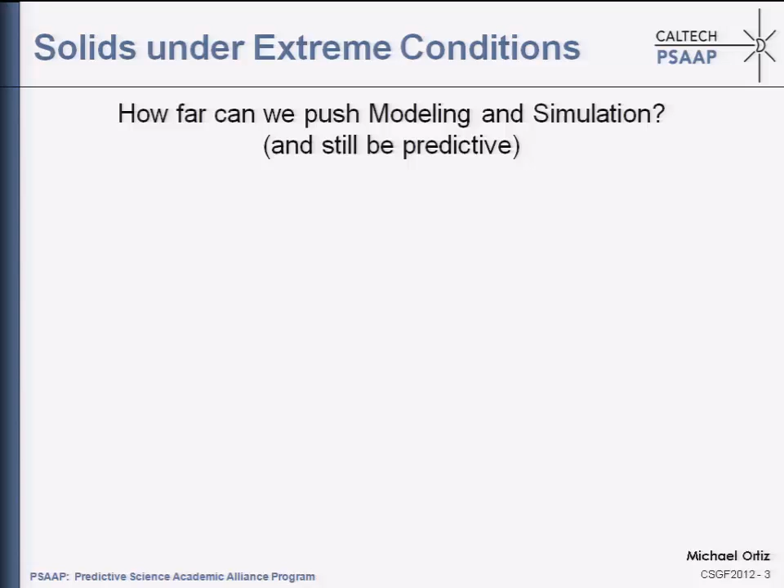Okay, so most of the work that I'm going to present is part of the Caltech PSAAP Center, the Predictive Science Academic Alliance Program, which I direct. It's one of five centers funded by DOE and NNSA over the country. And the main question that we ponder at the center is basically how far can we push our codes and our material models and still be predictive? Can we really predict material behavior and the behavior of complex systems under extreme conditions? So that's kind of our leitmotif.

And of course, you cannot ponder such a general question in a vacuum. So what we did from the start was to identify a challenging overarching application that would allow us to pursue the question in a concrete way. So we specifically chose hypervelocity impact. You see here some examples of hypervelocity impact tests. This is when you have a projectile that strikes a plate perhaps at 10 kilometers per second.

So you see here what happens; of course that's a very, very violent event. It really sets in motion very complex physics and very complex material behavior. Initially you can have, for instance, an impact flash where you have the formation of plasma. And in later stages, you can have the formation of debris and debris clouds. And these are things that you can actually measure in the lab. In fact, one of the reasons we chose this application is because we could carry out the tests in our own lab facilities.

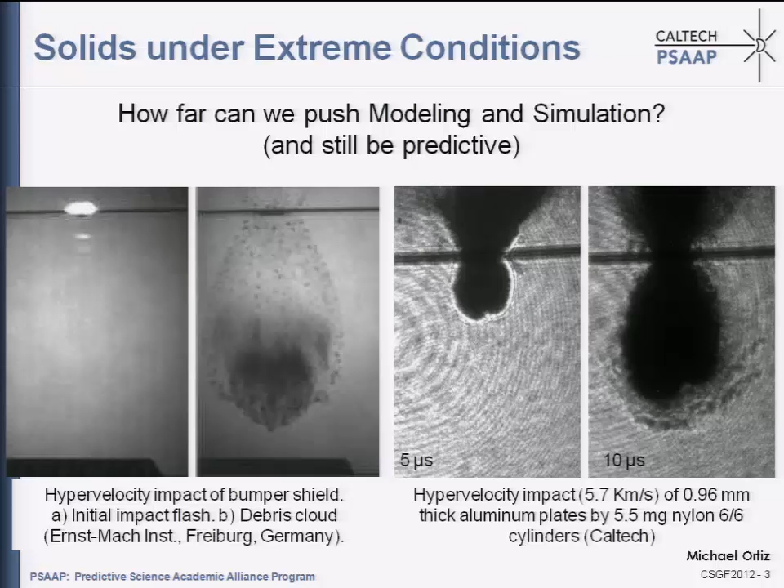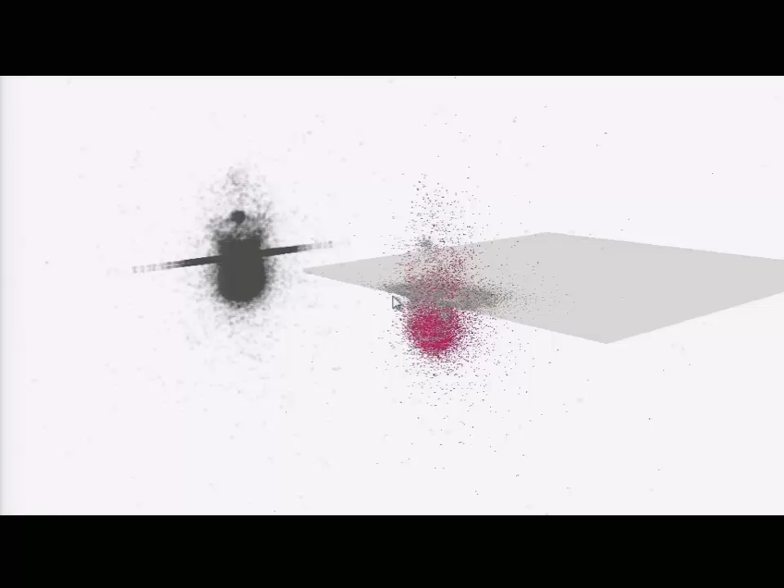And then each one of these things that you can measure, the intensity of the flash or the fine structure of the debris cloud, becomes a predictive challenge. So the question is, can you predict these things? So here's an example of how we do these simulations. These are particle simulations based on optimal transportation theory, where you have the projectile perforating the plate, and you can see, again, the formation of the debris cloud, forward cloud, backward cloud. And so we can generate many of the things that you can measure in the lab, and then we can compare and see how predictive we are.

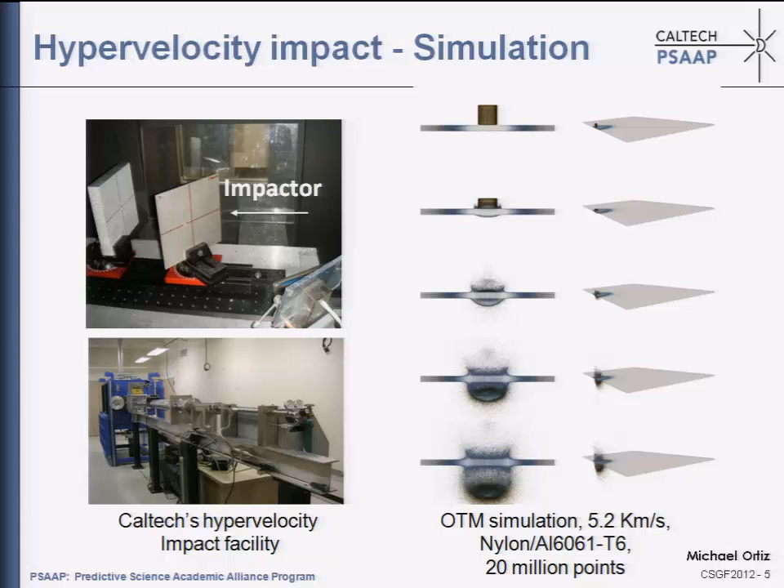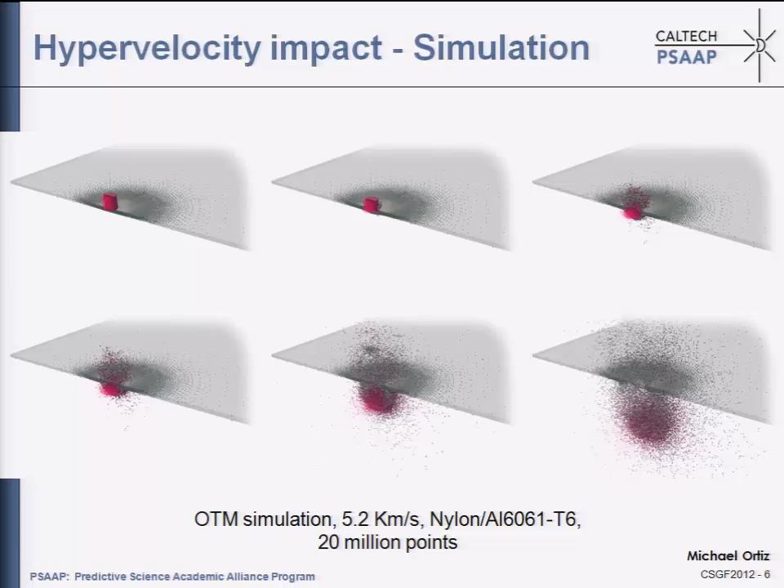So this is some of the lab facilities that we have in-house. Again, this is a typical simulation, in this case of hypervelocity impact at 5 kilometers per second. And the question is how well we can actually predict reality. So if we look at the anatomy of one of these simulations, you can see, of course, that a lot goes on. You have impact, you have complex material behavior, very high pressures, very high temperatures, very high strain rates. So the anatomy of a typical computational campaign is as follows.

You can think of it as consisting of several layers. At the top layer, of course, we don't do just one calculation, but we actually do thousands of calculations, what we call ensembles of calculations. And the objective is to garner statistics. The systems we are simulating are to some extent random. They can have random inputs, or they can become chaotic, for instance, fracture, fragmentation. And then the question is how well can you pin down the behavior of the system and what is the level of uncertainty in your predictions.

And for that, it's not enough just to send one calculation, but you have to do literally thousands of them, actually statistical sampling. And at this level, the purpose of the uncertainty quantification campaign, as it's called, is to, as I was saying, garner statistics and determine design margins and also levels of uncertainty. So that's very typical of the way we conduct calculations these days.

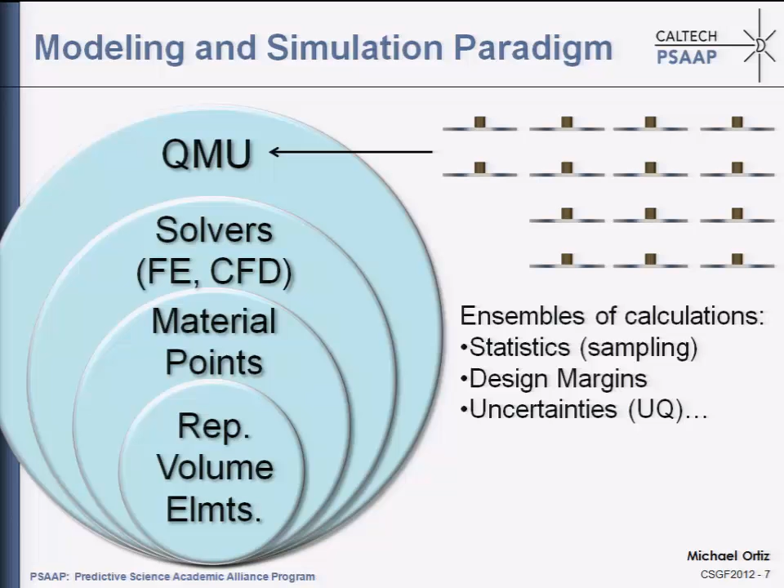It's not just doing one hero calculation, but actually literally doing thousands of them, and quantifying uncertainties. At the next level, you peel off the QMU layer, and you're looking at doing individual calculations. So here's where you have to contend with the global geometry of the system you're simulating. So maybe a CAD model.

You have to worry about boundary conditions, initial conditions, for instance, impact velocity of the impactor, the thickness of the plate. So these are all things that are passed into the solver, and the solvers are supposed to bundle all this information and move it forward in time. So this layer, the layer of the solvers, of course, is very sensitive to the details of the simulation, to the geometry, as I was saying, to the boundary conditions, to the initial conditions.

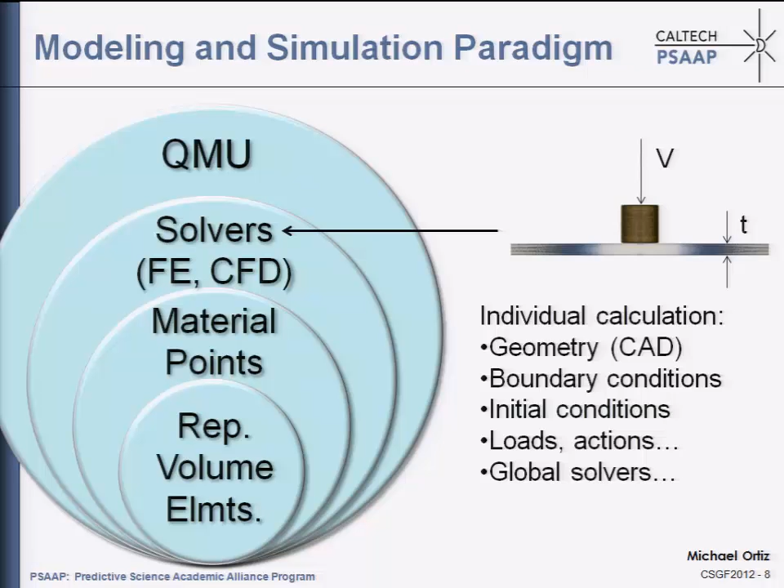However, if you move down one level, then at this point you're looking at individual material points, and these individual material points represent local material elements. So these are small bits of material that only see local conditions of deformation and temperature, and they're completely insulated from the geometry of the system.

So once you come down to the level of an individual material point, you have lost sight of the particular geometry that you're simulating, you've lost sight of the particular boundary conditions, and you're looking specifically at material behavior, the behavior of small samples of material. And that behavior is driven by local conditions and takes the form of material laws, constitutive laws, what have you.

And if you keep looking down in length scales, then you find that, in fact, material points are not just blobs, but they have a lot of structure themselves. So you start looking under the microscope, perhaps, and you see that an individual material point is not at all a point, but may have a polycrystalline structure. So it really represents what is known as a representative volume. If you keep looking down, maybe in each one of the crystals you begin to see individual defects, such as dislocations. You keep looking down, you start seeing individual atoms, and now you're at the level of quantum mechanics.

So it is this hierarchical point of view that perhaps describes best the anatomy of a modern computational campaign, if you want. And what I would like to focus on today is the description of the material at this level. So no matter what you do, the flow of information of a typical calculation will always take you at some point to the level of individual material points. And there the question is, can you describe that behavior? So that sets the boundary conditions.

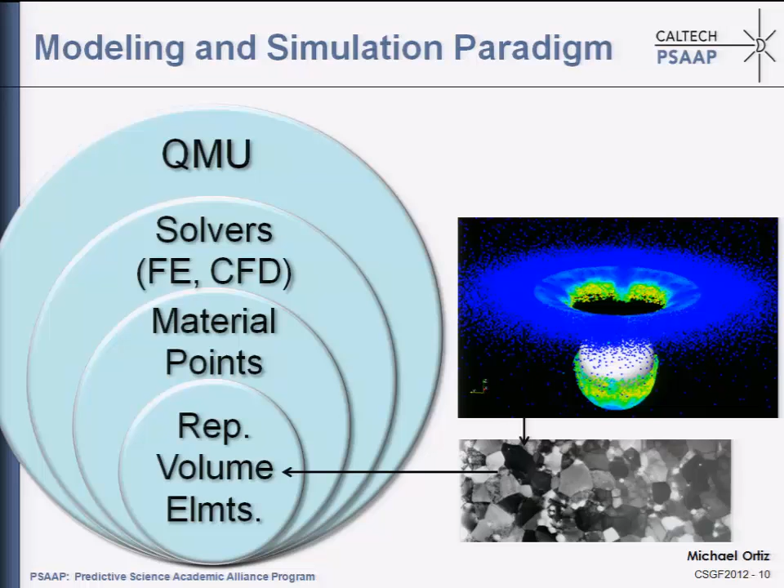And so this is a summary more or less of what I said. The material points, material models really sit at the core of full system simulation. So the flow will always take you to a material point, and you'll have at some point the need to describe the behavior of those material points. And that behavior is purely physics or chemistry. So at this point, you're completely insulated from the details of the global geometry, boundary conditions, and so on. And you're just facing physics-based modeling.

Then the other thing to be pointed out here is that, because material models really are the core of the simulations, they're really predictive bottlenecks. So the overall simulation, no matter how good a job you do at spatial resolution, at temporal resolution, so you can refine the resolution of your global system as much as you want. If your material description is no good, your global simulation will also be no good. So your simulations are only as good as your material models and never better.

So material models are really predictive bottlenecks. You really need to give them a lot of attention, make them really predictive if you want to have any chance at being globally predictive. And so how do you come up with high fidelity material models?

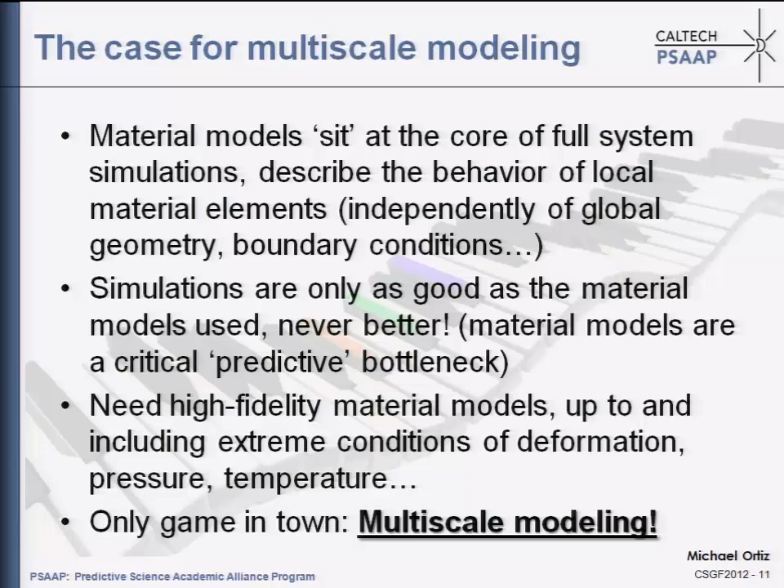And the physics is multiscale. So really the only game in town in terms of developing high fidelity material models is multiscale modeling. So what is involved in multiscale modeling? As I was saying, the reason that you need multiscale modeling is the physics of materials is really multiscale.

So say, for instance, you're trying to characterize the strength of materials. How do materials deform at high levels of stress and temperature and strain rate, for instance? Your global simulation may be at this level, so now you start looking down length scales and time scales. And so in a typical metal, you begin to see the polycrystalline structure.

So you see that, in fact, these material points are not points at all, but themselves have quite a bit of structure. The first level you encounter at the SEM level, for instance, you begin to see the polycrystalline structure. Then if you look within individual grains, you find that the behavior of each one of these grains is in fact far from being homogeneous, and typically you develop very fine subgrain structures that I'll come back to in a second.

Then if you keep looking down in the length scales and time scales, you begin to see individual defects, so dislocations, vacancies, and so on. Of course these are mediated very directly by the atomistic structure of the material, but still are at a continuum length scale. So maybe the scale of microns or hundreds of nanometers are still within the purview of continuum models.

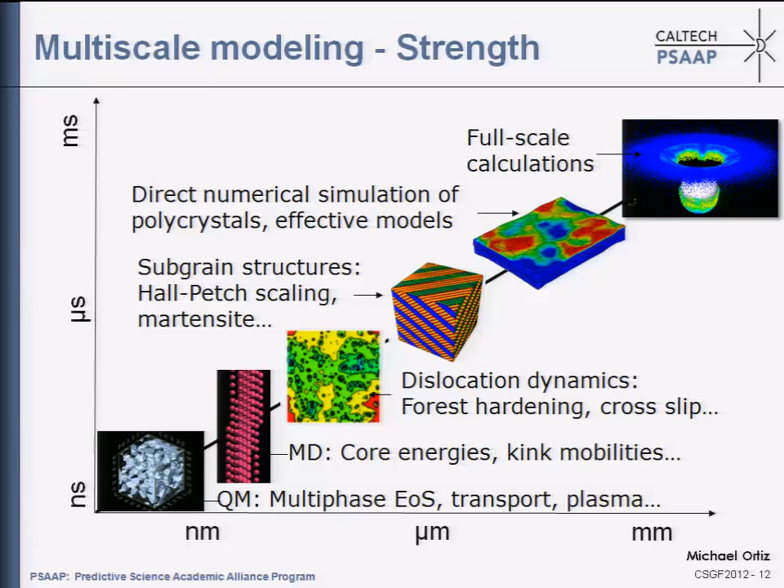So what is the big deal? Why don't we just go ahead and do it? Of course, multiscale modeling is much more easily said than done. So the question is, how do you actually do it in practice in a way that you can actually do the models in actual calculations, buy you some actual computational capability. The essential difficulty is that there are many vastly disparate scales.

You start at the atomistic level with quantum mechanics, and between that and your engineering application there could be maybe 10 orders of magnitude in length scales and also in time scales. So quantum mechanics will never do. There's a lot that happens between quantum mechanics and your engineering applications that determines the macroscopic behavior of materials, and somehow has to be modeled in some systematic way.

So whereas there are some processes that happen at the atomistic level, they're rate limiting. So lattice defects, transport, and so on. As I was saying, the macroscopic processes of interest, maybe ductile fracture or irradiation damage or aging of materials, may happen at length scales that are completely macroscopic. And there's a big gap in between, huge gap.

Also in terms of time scales, if you're doing a molecular dynamics calculation, a typical time scale will be maybe a femtosecond. You may be interested in aging of materials. That happens over years. So again, a huge gap in time scales that somehow you have to fill in if you want to model aging in a multiscale fashion. Also, the spatial scale gap: you have to go from angstroms to maybe millimeters and meters.

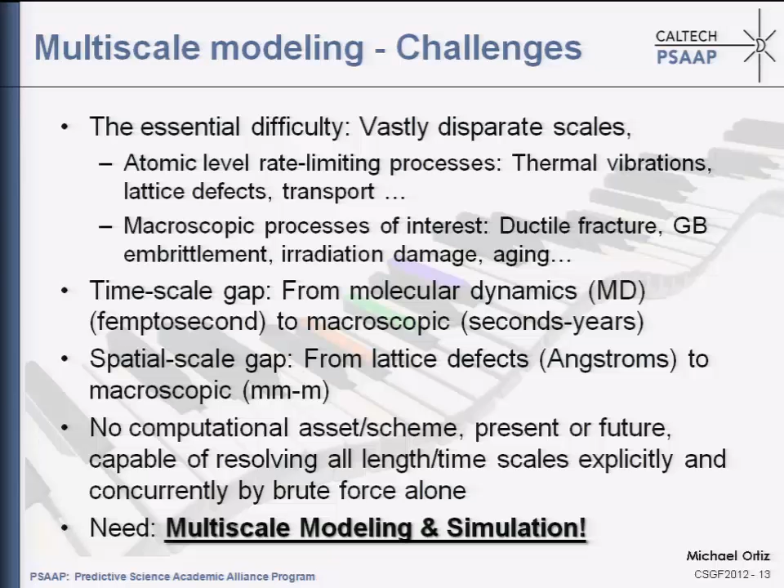How do we actually do it, provided that we cannot just do it by brute force? So now I'm going to fill in some details as to how you can actually bridge length scales in a practical way so that at the end of the day you have models of effective behavior that you can actually use in simulations.

So say you're Galileo Galilei and you're pondering the cutting edge question of the time, which is how do you model beam bending. Most beams at the time were made of wood. And of course, wood has a lot of microstructure; it's composed of cells. The cells could be in the millimeter or sub-millimeter scale, whereas a typical beam could be several meters in length or in span. So clearly you have a multi-scale problem here.

So if you're Galileo Galilei, what do you do? You say, well, fine. This is a multi-scale problem, but there is strict separation of scales. The length scale that I'm interested in is much, much larger than the length scale of the microstructure. So it turns out that under these conditions, if you have strict separation of scales, then you can do clever things.

Very often you're interested in the engineering application, so you want to know just what is the macroscopic behavior of your system, and you don't really care so much what happens at the individual cell level. You may have millions and millions of cells. You don't really care so much what happens in cell 500,002. You really are interested in the macroscopic behavior. So we would like to get rid of the microscale and come up with an effective model that we can use in simulations where the microscale has already been eliminated and is taken into account in some effective way.

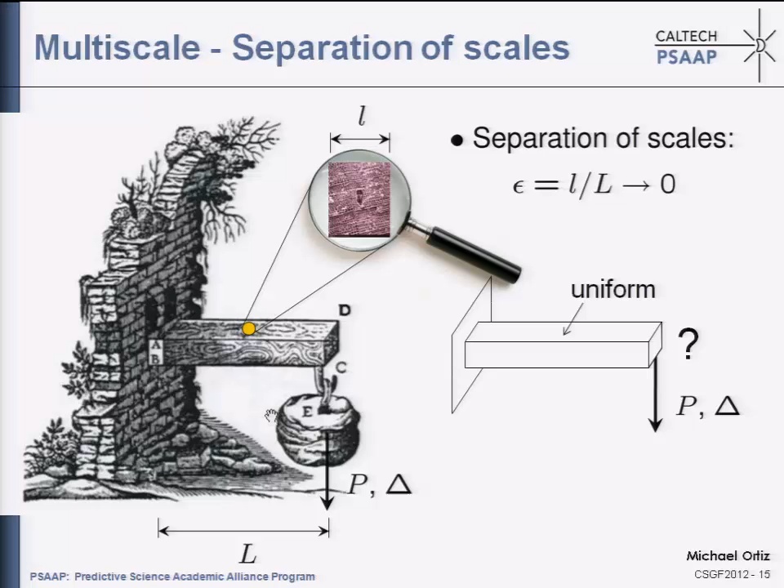So this is the objective. We have an engineering system that has structure on multiple scales, but there is strict separation of scales. So somehow we want to eliminate the details and come up with a uniform model that has already eliminated the microscale. The defining property of this effective model must be that it's indistinguishable from the original model at the macro scale. When you test the effective model and the original model under macroscopic conditions, they're indistinguishable.

In this case, for instance, Galileo Galilei may have been interested in computing the deflection of the beam when you hang a weight. So your effective model must give you the exact deflection for any weight that you hang at the tip. And that's the defining property of your effective model. So you have to eliminate the microstructure, yes, but the effective model has to be exact at the macro scale. In effect, the original model and the effective model have to be indistinguishable under macroscopic testing.

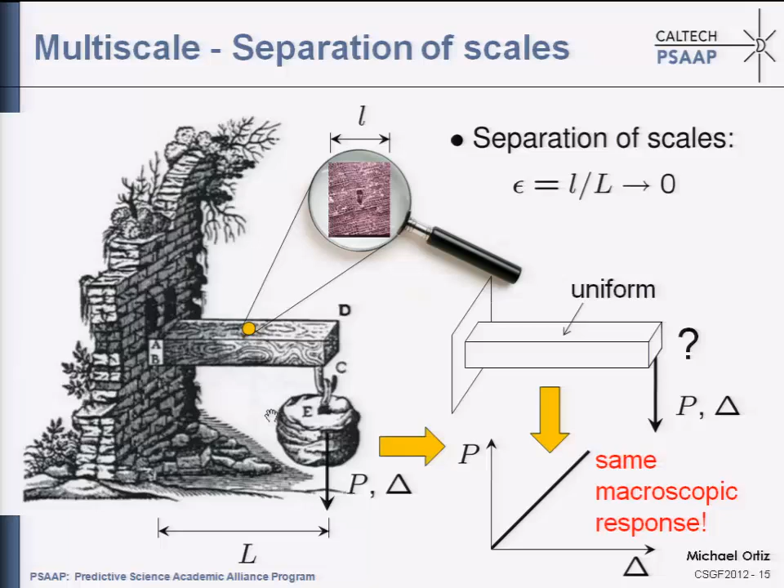There are many cases where the microstructure happens as a result of deformation. Initially, the material is uniform. You deform it somehow, and in response to that deformation, the material develops microstructures. In this case, of course, it's a bit more difficult because you don't know to begin with what the microstructure is. You have to predict what the microstructure is.

And this is an example taken from the lab of Rick James. What you see here is a shape memory alloy that is tested under biaxial loading. And you see here under the microscope some of the beautiful microstructures that are developed by these materials as part of their behavior. In many cases, the microstructures are also very fine, so there's strict separation of scales, so you can play the game.

And in this case, the objective would be to develop an effective model that you can use at the macro scale that has eliminated, again, the microstructure, but that gives you a macroscopic response that is indistinguishable from the original system. And these kinds of situations perhaps are more generic in the sense that you don't know what the microstructure is beforehand. It's part of your prediction.

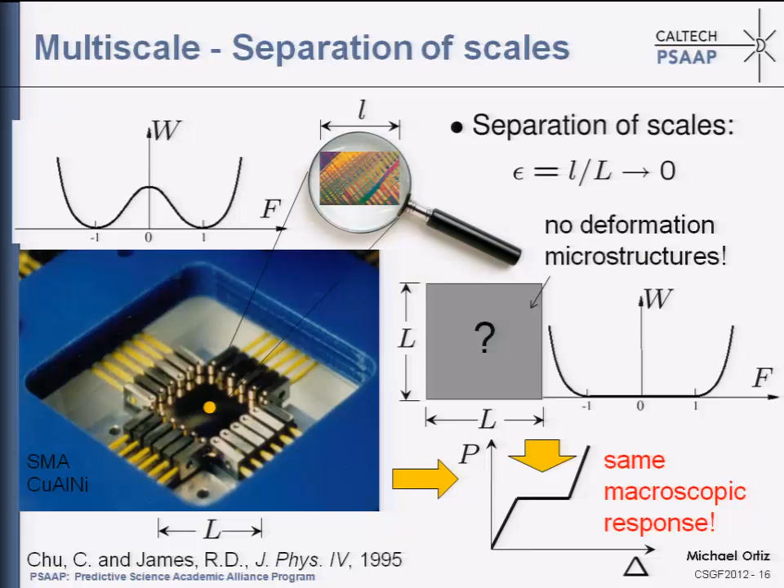Okay, so fine, but how do you do it? Of course there are many methods that have been developed, some of them going back to the 19th century. Statistical mechanics was really intended to be a multiscale method, where you go from thermal vibrations to macroscopic equations of state. So there are many methods for bridging length scales. Some of them are better than others. So let me give you an example just to convey the flavor.

There are some situations where the behavior of materials is governed by energy minimization. Basically, there is some energy functional, and the material will develop microstructure in such a way as to minimize its energy. In this case, there is a standard theory called the calculus of variations that provides a recipe, basically a crank that you have to turn, that at the end of the day will give you the effective behavior of the material. And physically or intuitively, the scheme is very clear.

You may have a macroscopic application. I've chosen one at random, say deep drawing here, of a cup. At this level you want to have an effective description of the material. You don't want to contend with microstructure. What you have to do is consider what are known as representative volumes, so small volumes of material. And within each one of these representative volumes, somehow you have to pre-evaluate all the possible microstructures that will occur.

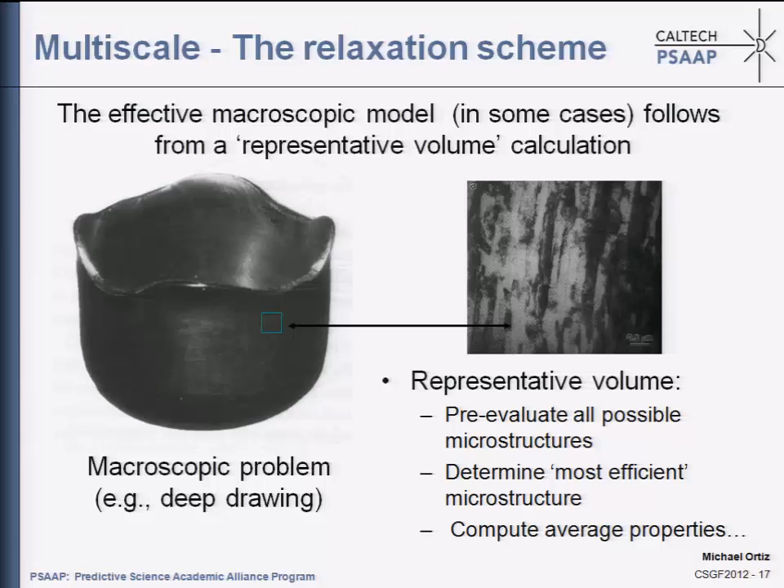Typically in metals, you have microstructures of this type. This is an actual SEM picture of a deformed metal. You see that deformations at the micromechanical level are very non-uniform, so the metals form microstructure. And so the objective is to pre-evaluate all these possible microstructures, also determine the most efficient ones, and based on those optimal microstructures, as they're called, pre-compute the average behavior of the representative volume. That average behavior gives you the effective model, and that's what you use then, for instance, to simulate deep drawing. So that's the basic scheme.

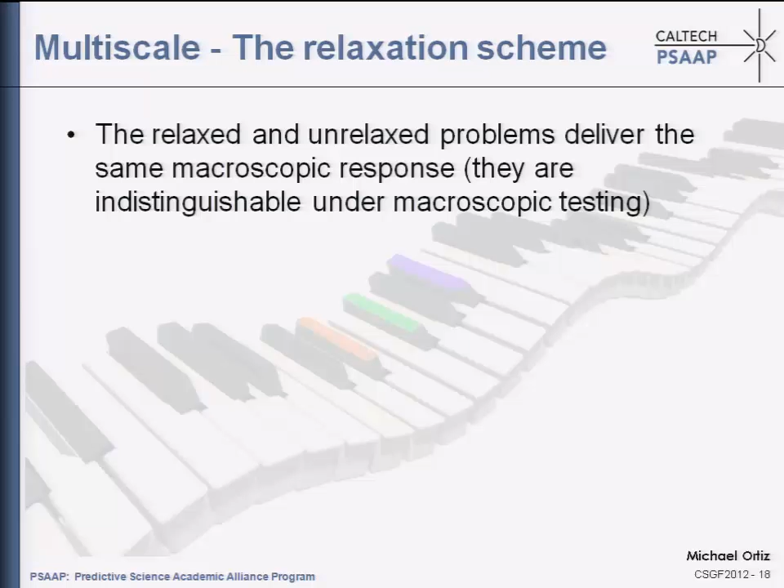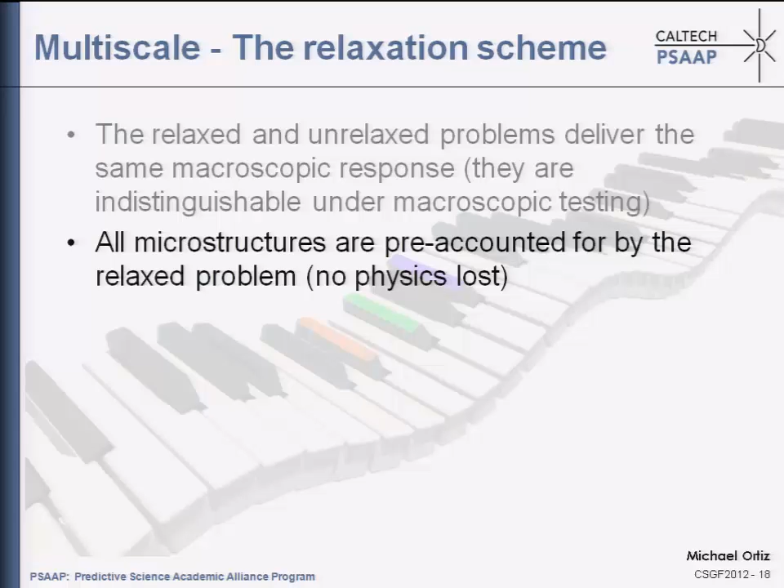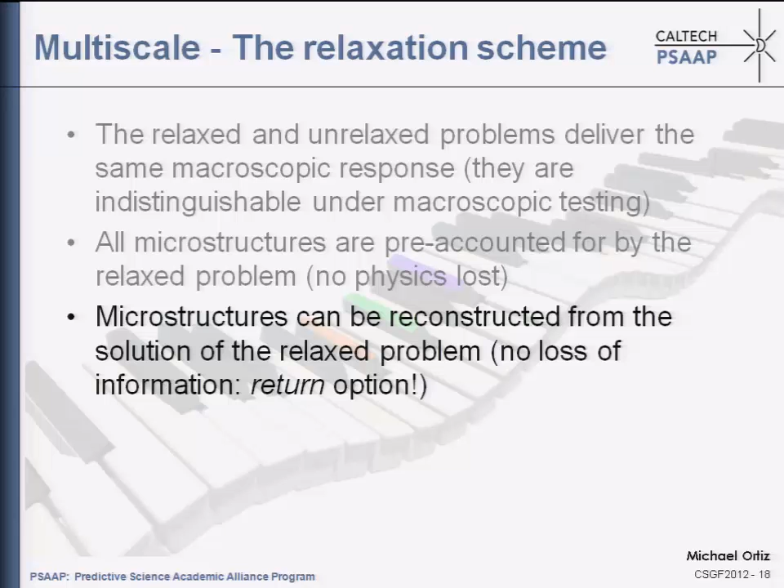And in this kind of modeling, because you know what the optimal microstructures are, at the post-processing level, once you've done the macroscopic calculations, you can always go back. You can always generate microstructures of interest and query them for extreme conditions, maybe of pressure, temperature, not just average conditions in the element of volume, but also the extremes of the distribution. So this kind of scheme is very nice because it has built in a return option.

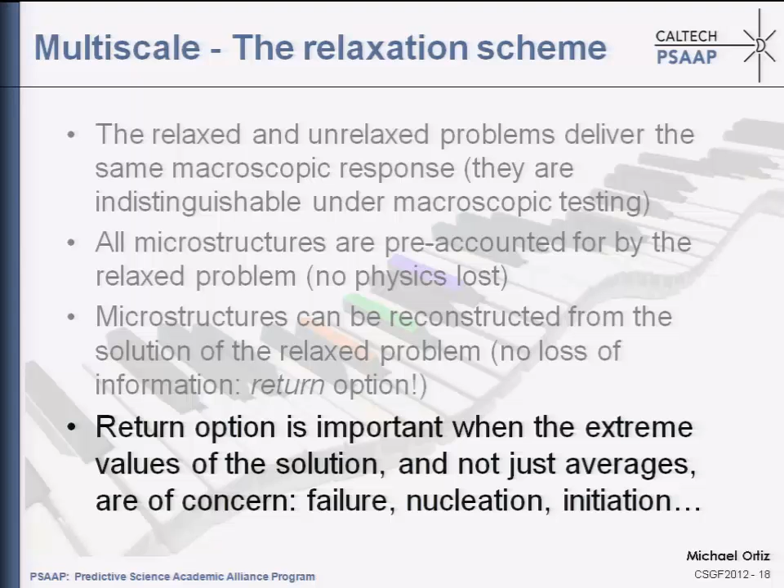As I was saying, this return option is important when the extreme values of the solution and not just averages are of some concern, because of failure, because you're interested in nucleation, initiation, or some other reason. Okay. So let me give you an example where this kind of scheme actually is essential in the sense that, as far as I know at least, there would be no way of doing these kinds of simulations without multiscale modeling of this particular type.

And so the particular application concerns detonation of high explosives. In particular, what one wishes to understand is initiation sensitivity. So what is initiation sensitive to? And so the standard picture there is that, again, this is a multiscale problem in the sense that these HE materials have a grain structure, and then molecular dynamics simulations and also direct observation show that at the subgrain level, the material develops microstructure.

So when you look at individual grains, you find that the deformation is far from uniform, but it can localize along very narrow shear bands. Those shear bands actually deform much more than the average deformation of the material. You develop very high pressures there, very high temperatures, so you have hot spots. And so initiation, of course, is all about developing hot spots. It's no longer just about average conditions in the grain, but the extremes of the distribution.

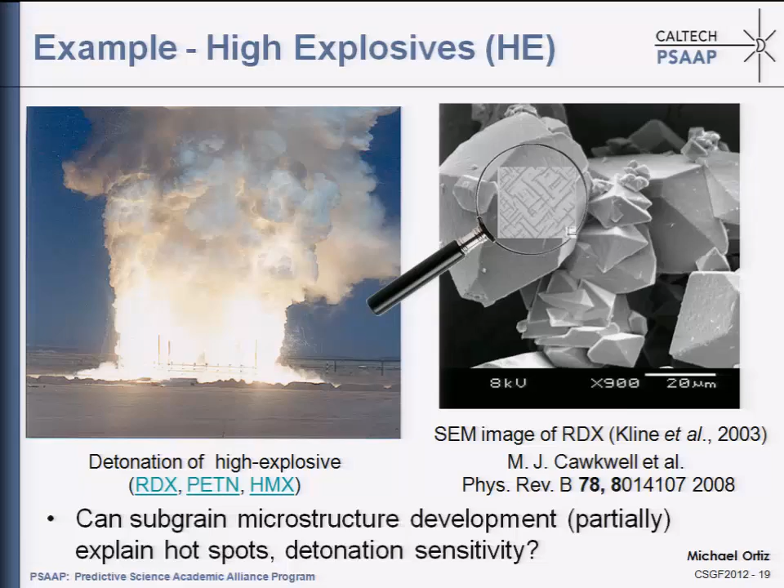So here, these materials are molecular crystals. There is rather little information about the behavior of these materials, for instance, the plasticity of these materials, the strength of these materials. So we filled in those gaps doing ab initio first principles calculations. When I say we, I really mean my colleague Bill Goddard and his group. And there are a number of basic properties that we computed this way, and we used them to populate the single crystal plasticity model that operates at the single crystal level.

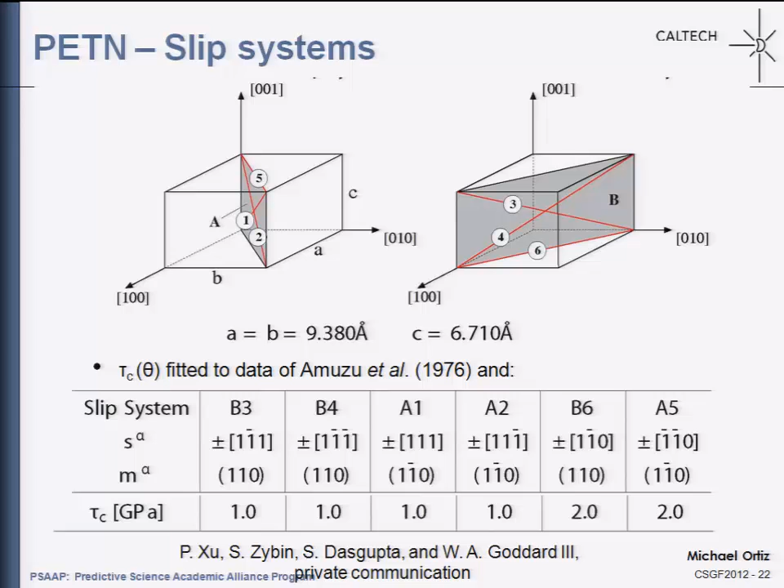So as we were saying, there is very little that is known about these molecular crystals, for instance, PETN. So what are the active slip systems? What are the yield stresses for the activation of plasticity? Those are, for the most part, unknown, and were computed from quantum mechanical simulations. And at that point, we are in a position where we have a baseline model at this level. We can unleash the microstructural calculations and then compute effective behavior and use it at this level.

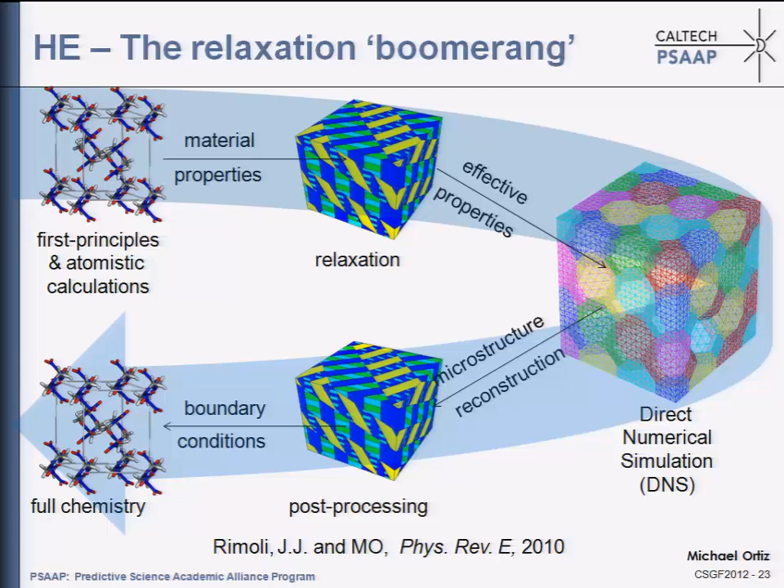So then we can go back at the post-processing stage, generate microstructures of interest, and then pass boundary conditions to our colleagues. Typically, the microstructures that you find are microstructures where you have extreme concentration of deformation at some points. So these are the hot spots. It turns out that the time scales in the development of these hot spots are of a microsecond.

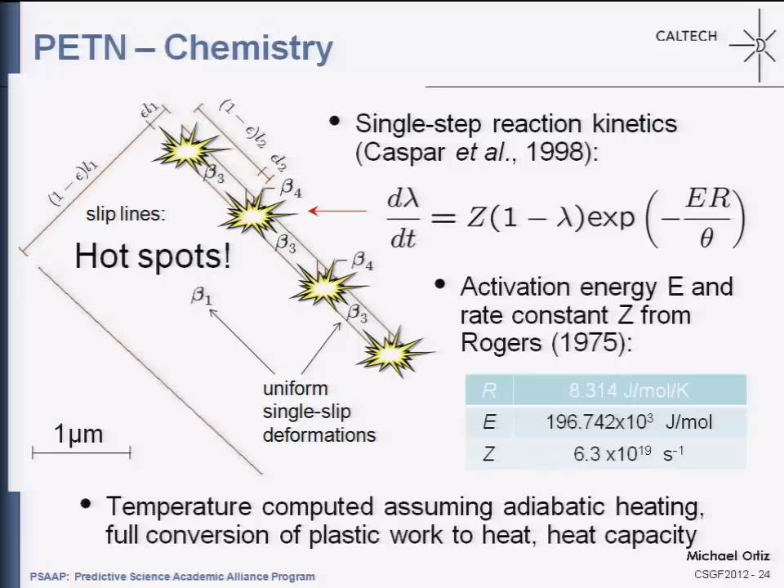So if you go to somebody like Bill Goddard and say, please do a quantum mechanical calculation over a time span of microseconds, he'll say it's absolutely impossible. So just to demonstrate the connection with chemistry, we used a very simple single-step reaction kinetics as a placeholder to full-scale quantum mechanical chemistry calculations.

And so then we try to make contact with engineering testing. So very often these materials are tested in a plate impact configuration. So you have a plate of PETN, and you have a flyer plate that is sent against the specimen maybe at 1,000 meters per second. So that induces a shock that goes through the thickness of the plate, and in some cases induces detonation or initiation. In some cases, it does not. So of course, the predictive challenge here is to determine when you have initiation and when you don't.

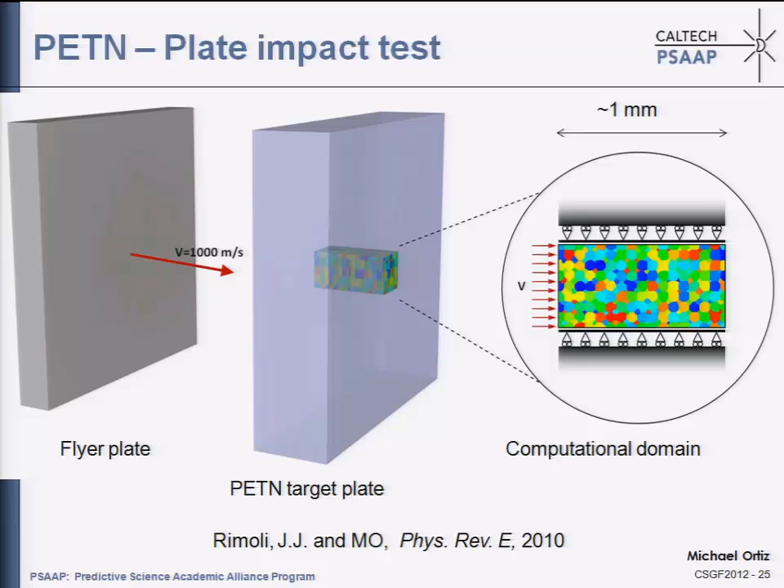And so the way we do the simulations in this case is we just take a core of material through the thickness, and we apply periodic boundary conditions around the perimeter of the core, and then this would be the computational domain. So it turns out that these days we have enough computational power that you can resolve the polycrystalline structure of the material explicitly. So here's where you can use brute force.

In the old days, there were people that spent entire careers trying to characterize the effective behavior of polycrystals. So these days, at least this is a case where we don't have to be clever. We have enough computational power that we can actually resolve explicitly the polycrystalline structure, and we do. So this is a typical mesh that we would do in the calculations. So this is a typical simulation.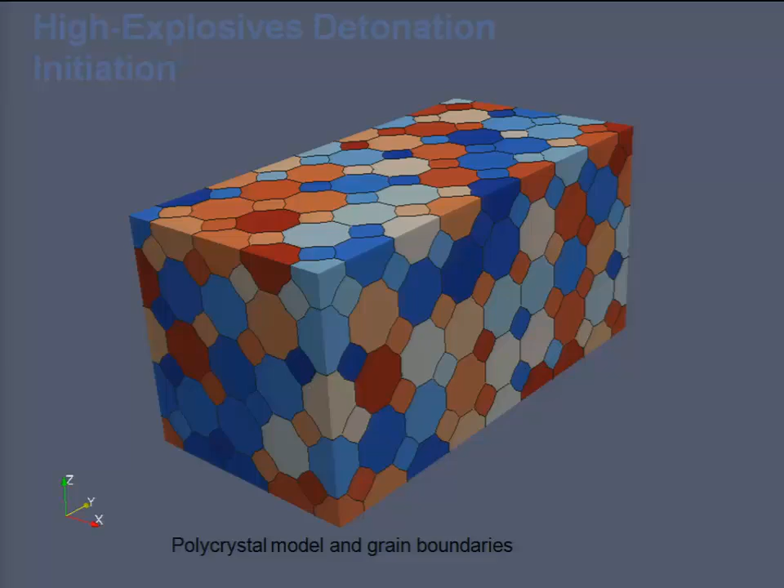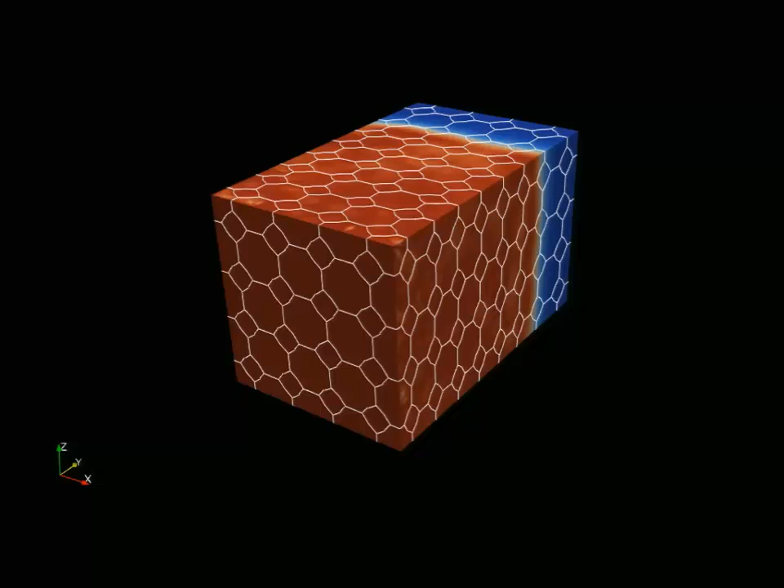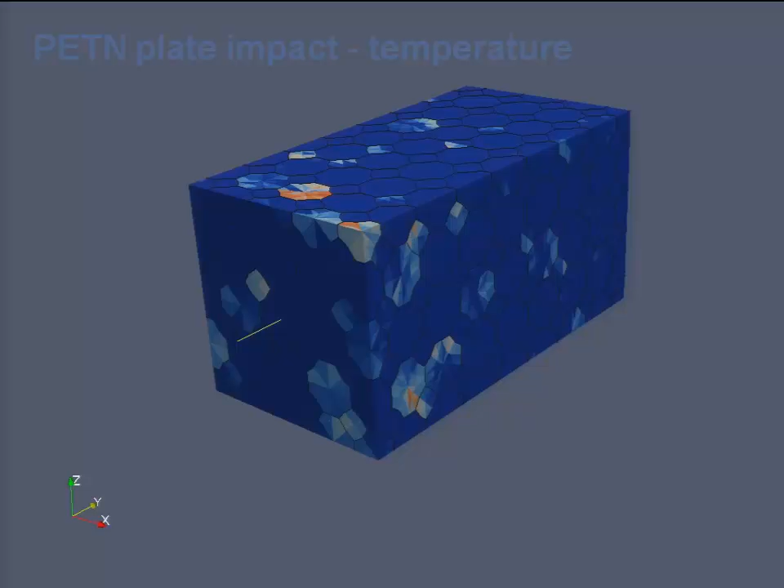So what you're seeing here is the effective model being exercised. What this effective model is giving you are average conditions. Not peaks, but average conditions. So you see some fluctuations here in velocity in this case, and those fluctuations are due to the polycrystalline structure. So there are some fluctuations, but definitely not hot spots, something you could call a hot spot that could be responsible for initiation. So again, this is a map of temperature. You see some fluctuations, but again, very mild fluctuations just due to the polycrystalline structure.

And what I'm showing here is that I've taken two material points at random, and I'm showing the evolution of the microstructure, predicted by the microstructure model, at each one of those material points. Of course, there are thousands or perhaps millions of these material points, and this is just a sampler.

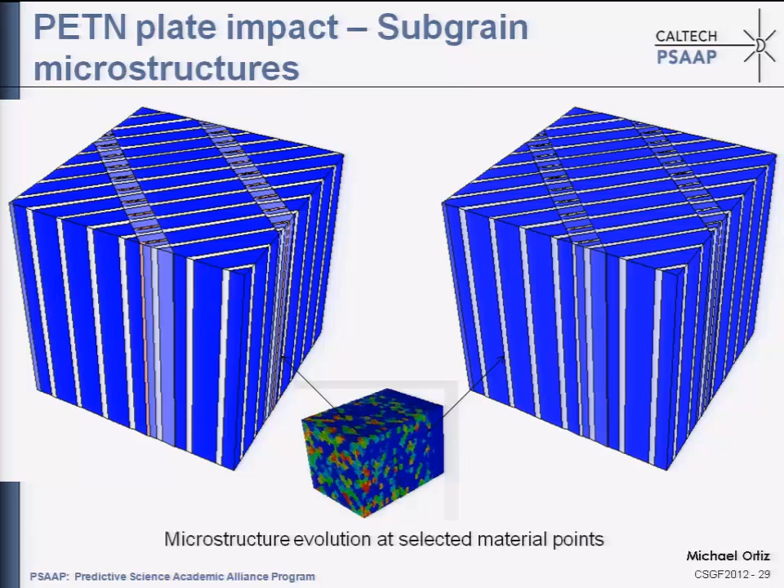And what you see is that at individual material points, you develop very fine microstructures, where there are regions that are very highly deformed, that attain very high temperatures, and conditions that are, in fact, highly in excess of the macroscopic averages. So whereas the macroscopic average doesn't really give you any useful information regarding hotspots, the microstructural model gives you at least some handle on extreme values in the distribution of pressure, deformation, and temperature. And then you can collect some hot spot statistics, which is what I'm showing here.

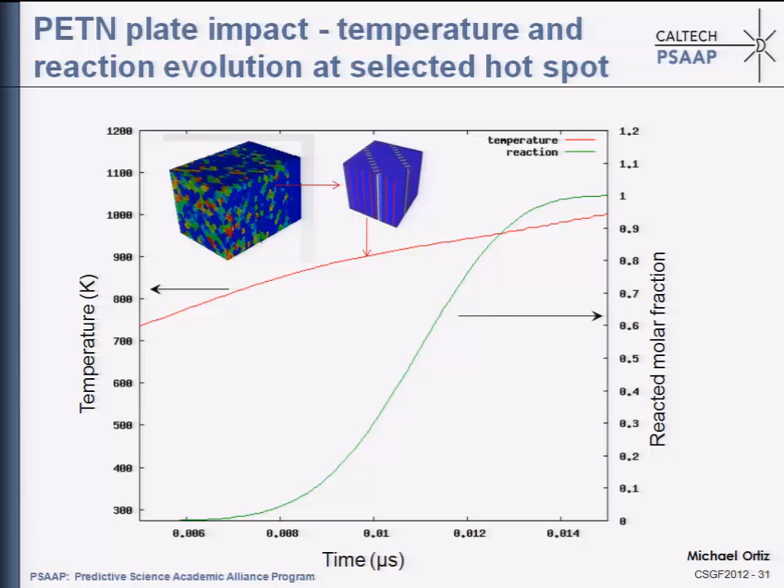So this is the evolution of a typical hotspot, how the temperature rises. This is the molar fraction of a reacted product, showing, in this case, full initiation. And because we have a microscopic model with thousands of material points, thousands of microstructures, we can collect statistics regarding hotspots. So, for instance, you can plot here the number of hotspots where the reacted molar fraction exceeds a certain value. So as we're saying, you have some handle on the statistics of these hotspots.

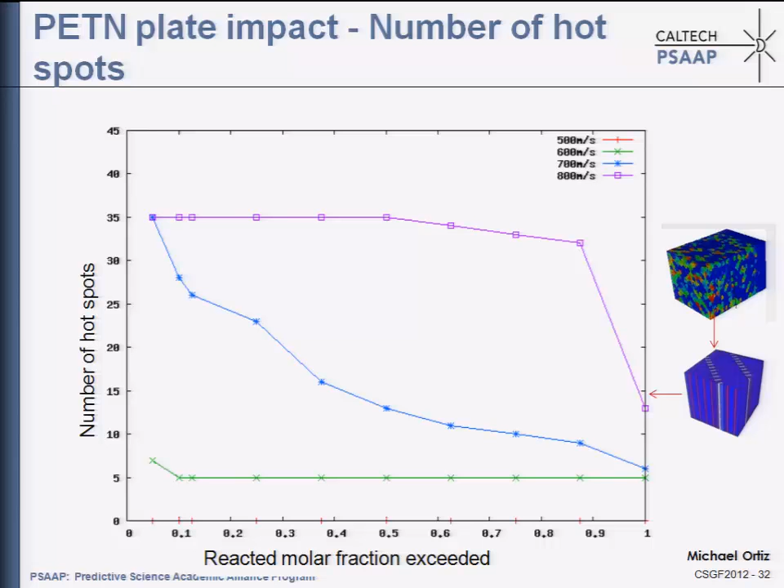And the payoff at the end of the day, why this is interesting, is because now you're not just confined to quantum mechanics, but you actually can make contact with engineering testing. The vast majority of tests that are done for these materials are done at the engineering level. So drop weight towers, things that definitely happen at the macro scale. And to make contact with these test data, and that's ultimately what you want to do to assess predictiveness, you have to make contact with test data.

To make contact with engineering test data, you really have to go all the way to the macro scale. And so these are some typical results from tests that would be conducted, for instance, at the Army Research Lab. And typically what they do is they plot in a logarithmic scale. This is what is known as a Pop plot, the input pressure versus the distance to detonation. And they find that there is this power law relation.

Okay, so with the multiscale model, because we have control on hot spots, we can produce more or less the same plot and exhibit also power scaling of some type. So from the model that we use, we get an exponent which is 2.9, whereas for PETN, you get exponents in the lab that are perhaps 2.5. So there's still a little bit of a gap.

You can see that the model perhaps is not exactly predictive, but at least you're in a position where you can assess the predictiveness of the model. So this is basically the best that we can do at this point. So we know that if that's not good enough, then you can go back and refine the model. But at least we have a way to make contact with testing and assess predictiveness.

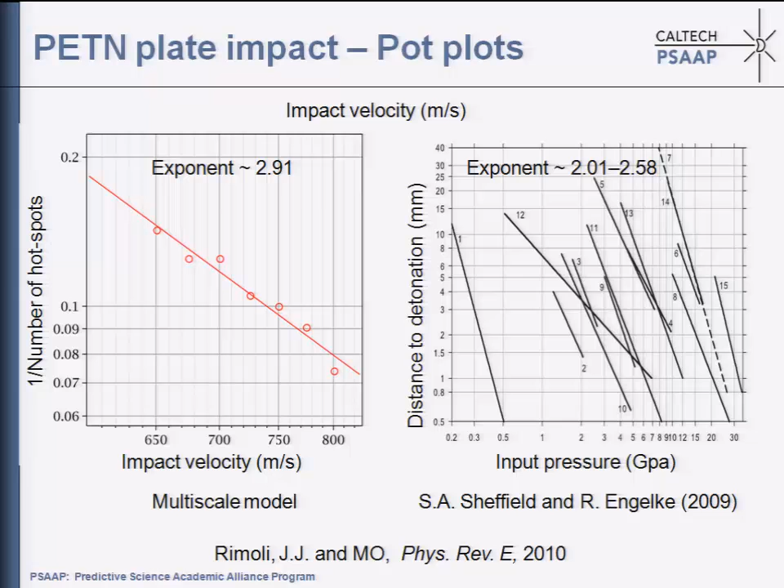So this is just a summary of this kind of methodology. In a way, you can think of this as an optimal way of doing upscaling where there is no loss of information, and therefore you can always go back. And the application to HE, and specifically taking the simulation all the way to the engineering level, I think could only really be done this way.

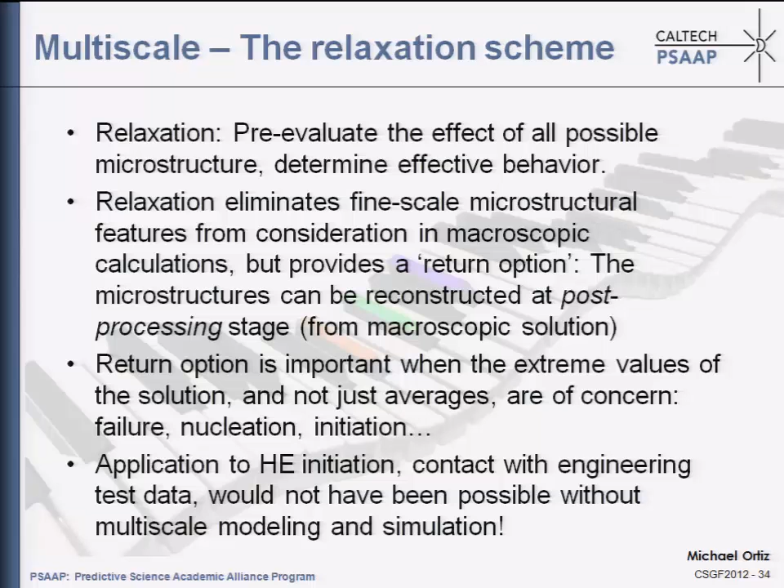Now, just to give a counterpoint to this, so not to give you the impression that somehow these relaxation methods are the panacea that solve all multiscale models, let me give you a counterexample of a case that is not amenable to relaxation, the kind of upscaling that I described earlier. So it's also a multiscale situation. It has to do with fracture and fragmentation.

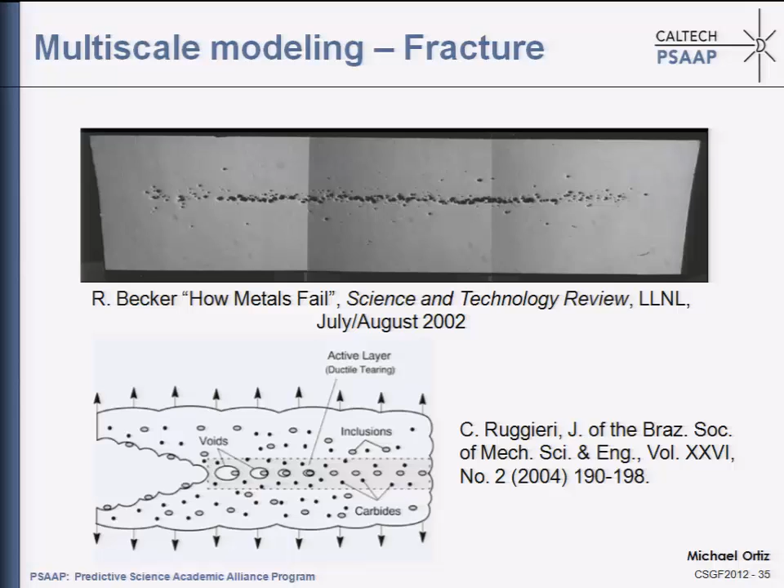And here, the multiscale hierarchy that you find is that the ductile fracture of the material is ultimately the net effect of the formation of voids and the coalescence of voids. So if you look at it as a multiscale problem, at the top level you have the formation of a ductile crack that causes the failure of the material. If you start looking down, you see individual voids that grow under the action, for instance, of hydrostatic pressure. Then these voids somehow nucleate at some point at the nanoscale by emission of dislocations.

So that would be the nucleation event. Perhaps the nucleation sites are second phase particles, for instance, in steels, or something that is pre-existing, or under extreme conditions, the nucleation sites can maybe be generated by vacancy aggregation. And then at some point, you need to understand, therefore, the properties of vacancies.

Vacancies are individual missing atoms or atomic level defects in metals. And so you have to have control on the properties of individual vacancies, divacancies, vacancy mobility, and so on, so you can evaluate the behavior of the material at this level. And this is something you can do at the quantum mechanical level.

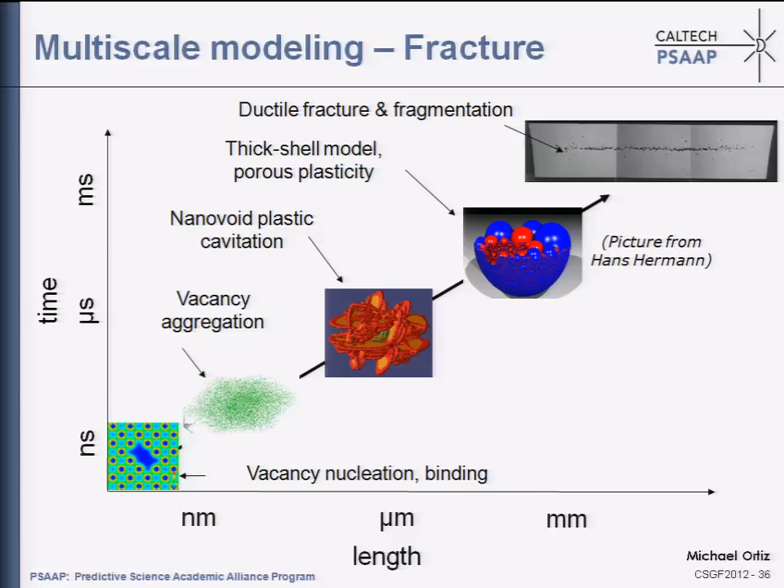So specifically, this step where you go from distributed damage to localized damage is something that is not amenable to the kind of upscaling that I described earlier. So this is what I said: void nucleation, growth and coalescence. And fracture provides an example of a multiscale situation where, because the damage becomes localized to a plane, it's no longer just a representative volume kind of situation.

It's not about volumetric averaging, but to get at the fracture properties of the material, you have to allow for localization of damage to individual fracture planes, what are known as void sheets. So here the relaxation scheme would completely break down and would give you something completely useless. Here we're not in the market for constitutive models or equations of state. What we want is really fracture properties, which is a completely different type of physics.

There are other methods that you can use. Of course, that would be another lecture. These are called optimal scaling methods. Those give you optimal bounds of the fracture energy, for instance, as a function of fundamental properties of the material, such as surface energy, hardening properties, and so on.

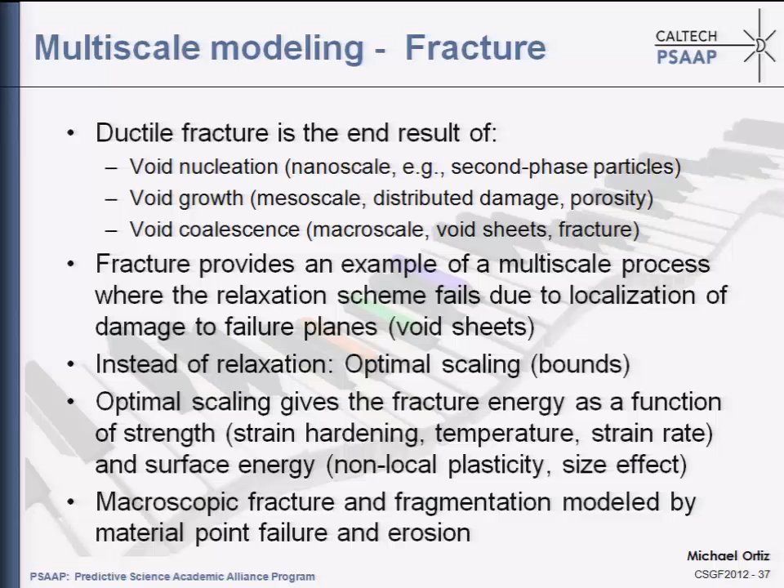So there are methods that you can use that actually give you the effective fracture properties you want at the end of the day. But it's, as I was saying, a counterpoint to relaxation methods. And the point is that there is not a panacea. There is not a single method that will give you all effective behaviors of interest. You really have different types of behaviors that require different methodologies.

So just to give you an example of the kind of predictive capability that we can get in the area of fracture. This is a very nice set of tests that were run at Lawrence Livermore by Jeff Campbell and co-workers. What they did, they took a spherical shell made of steel, and they blew it up. They detonated some high energy material here on one side of the shell, and of course the detonation causes the shell to break up and undergo fragmentation, in fact, fine fragmentation.

And the nice thing is that they showed a lot of pictures of how the process takes place, and they also collected fragments. So they were able to recover fragments and provide statistics of, for instance, fragment sizes. So again, you have a data set that you can compare against to establish predictiveness or to assess predictiveness.

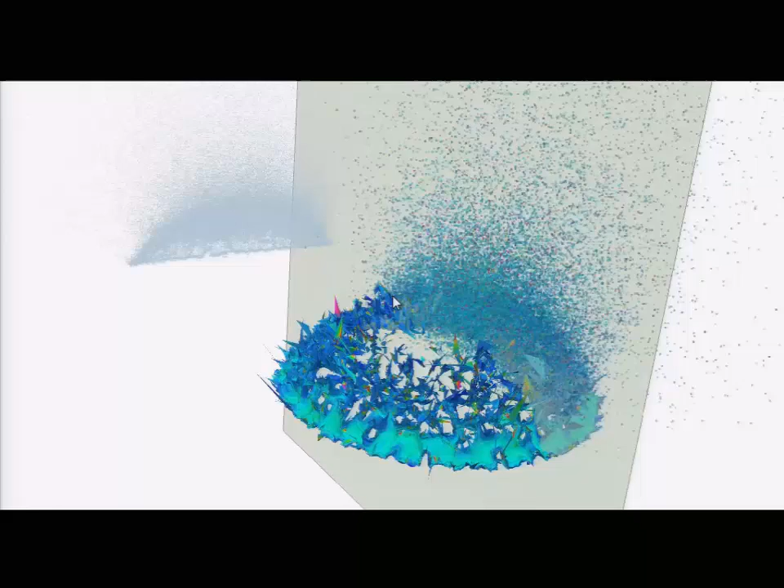So here you have some simulations that we do at the center of this particular type of test. These are supposed to replicate the Campbell et al. test. So you have, again, a spherical shell, and in this case we just apply a simple drive that models somehow the detonation. You can see here the formation of very fine fragments. We do this with a material point method, so the way we model fracture and fragmentation is specifically by failing material points. And what the multiscale model tells you is exactly when you have to fail a material point.

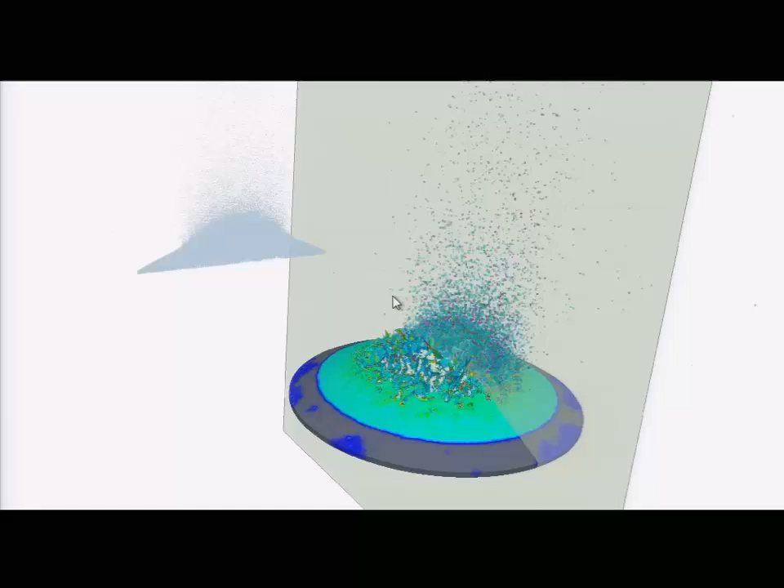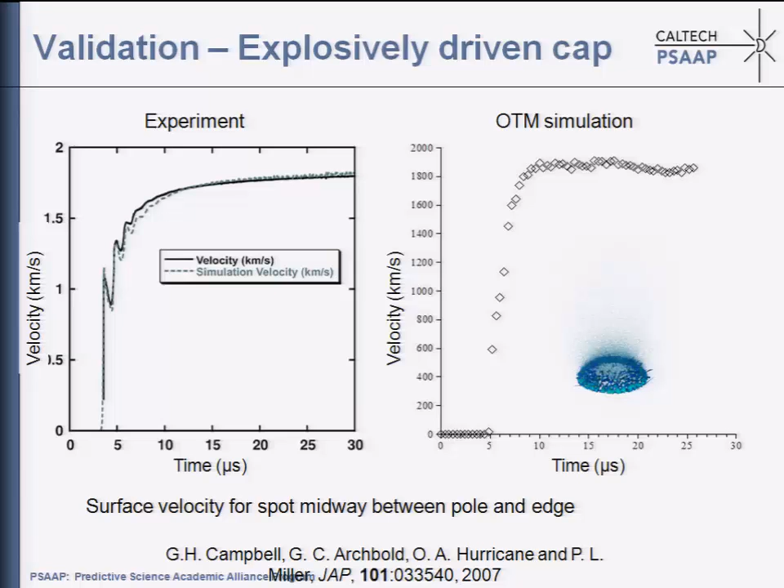And you can see that away from the center of the shell you have fragments that are much larger in size. So you have now measurements you can compare against. This is the experiment, the velocity at some point in the shell versus time. This is what you get from the simulation. So it's not entirely perfect, but considering that we didn't simulate the drive exactly, we are, I think, in the ballpark.

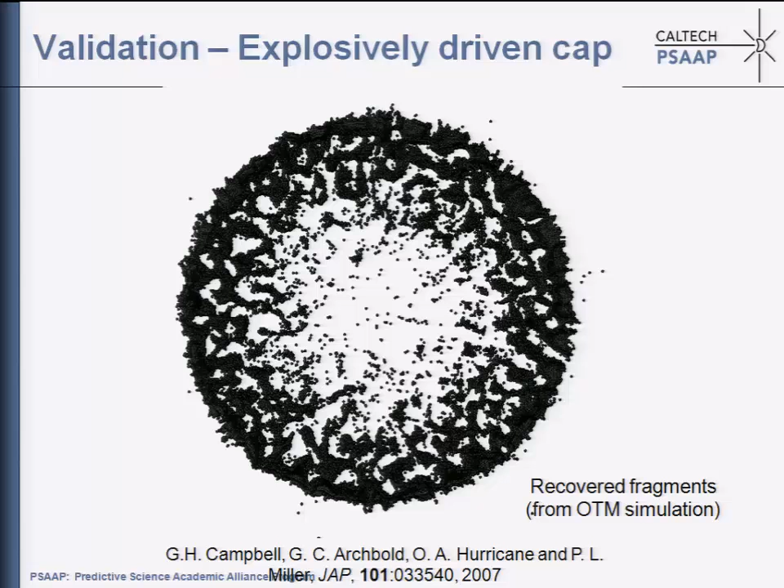And these are the fragments recovered from the simulation. At the end of the simulation, we went around, we looked for the fragments that are in excess of a certain size. We put them back together, so these are the recovered fragments, not from the experiment, but actually from the simulation. And so now we can put together histograms of fragment size, and I can compare with the ones that were measured experimentally.

So here you have the experiment. This is the size of the fragments, and this is the number of recovered fragments. And here you have the fragment size from the calculations and the number of recovered fragments. And you actually see more or less a reasonable correlation regarding, for instance, the mean size of the large fragments. There are two peaks in the distribution, both in the experiment and in the simulations. I really have no idea why there are two peaks, and why we actually get two peaks. Maybe it's just a complete fluke, but you count your blessings.

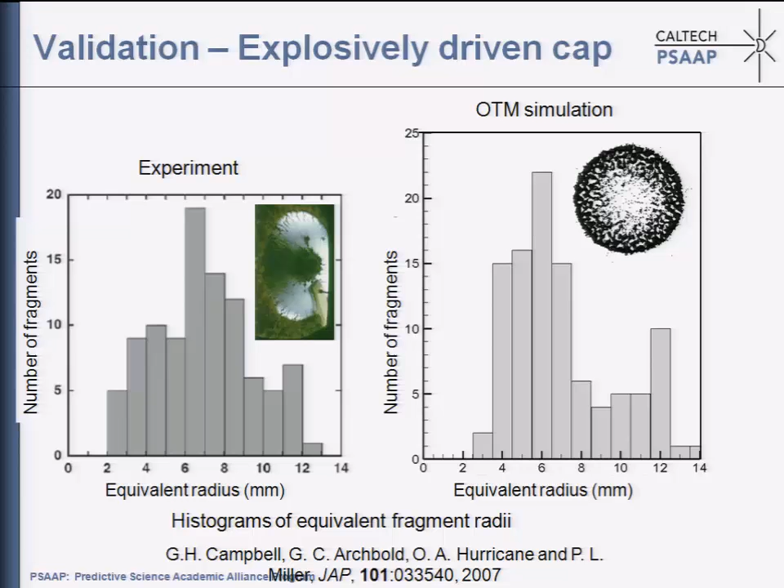And generally, perhaps the key point is that we can make contact with engineering testing, macroscopic test data, in this case from the experiment of Campbell et al. So this is just a summary of the main points. At some point when you do simulation of materials, you have to contend with material behavior somehow. I'm sure as part of your PhD thesis, whether you come from physics or from chemistry, from computational mechanics, computational physics, mathematics, at some point you'll have to contend with some type of material behavior.

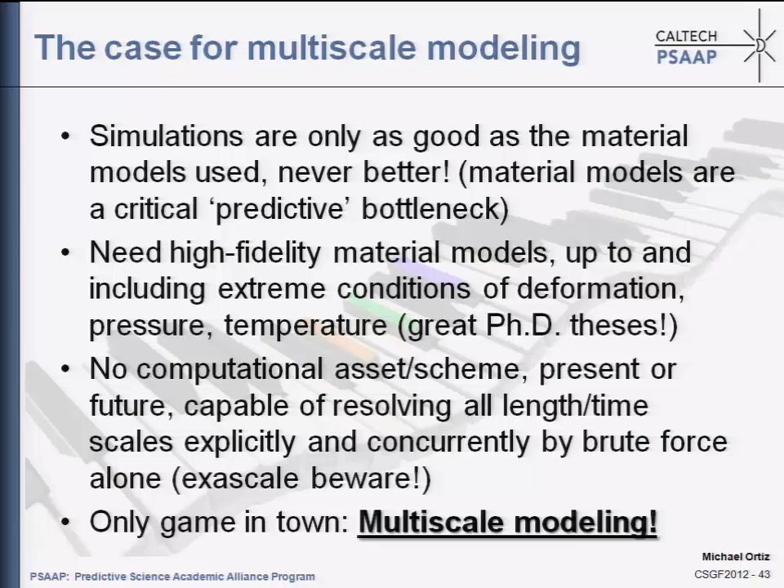And you'll find that more often than not, materials actually are multiscale. They exhibit structure on the multiscale, either built in from manufacturing or because of the deformation process itself. And material models are a critical predictive bottleneck. If you want to be predictive, you have to do a good job at modeling and simulating material behavior. So there is a need for high fidelity material models. Brute force won't do, so the only game in town is multiscale modeling.